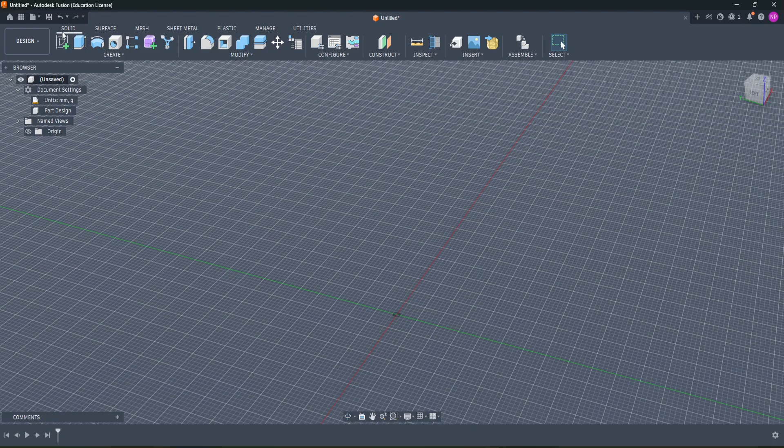Fusion is a solid modeling program, here I am in my workspace. I'm going to come up here to create a solid. I'm in solid, so that's underlined right here. I'll go to create, and come down here to box. I'll put it on my top plane here, start at the origin, and make it 20, then go up 22, so it's rectangular.

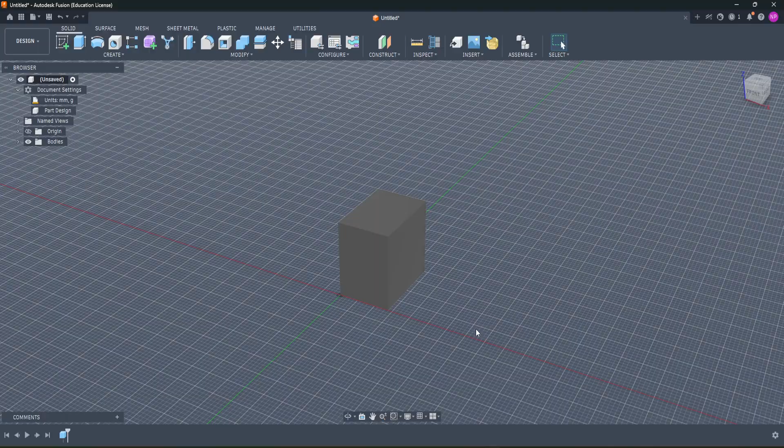Just to make the shape a little bit more interesting, I'm going to add a cylinder, extruding out from this side. So these are now one solid body.

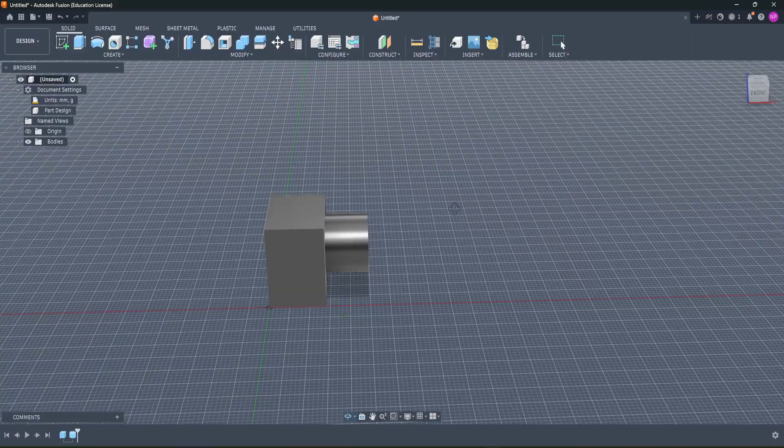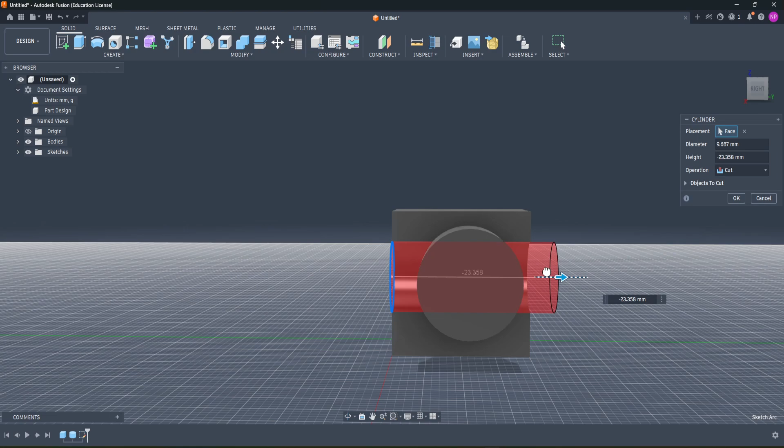Now let's say I want to make a cutout that goes right down the middle here. I can come to my front view, create a new cylinder, draw it on this plane, rotate, and extrude it through. You see how the color changes to red? That means I'm cutting through, as opposed to the blue color, which means it's a new solid. So I'm cutting through, and when I hit enter, I can see I've cut a solid hole perfectly through this object. If I go to my front view, it is perfectly circular. That's pretty cool.

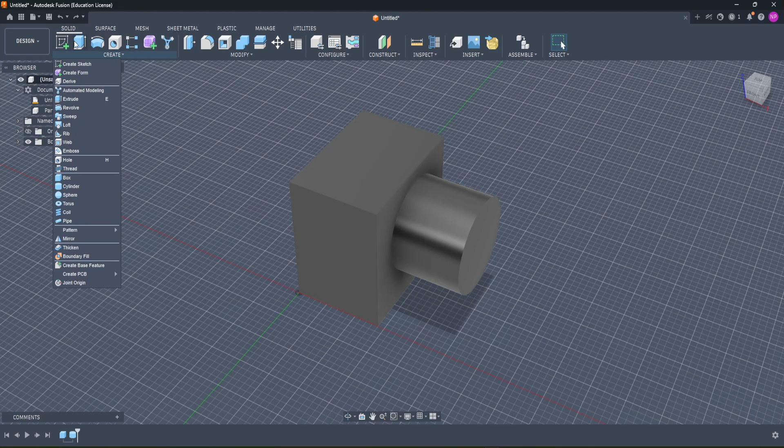Another way I can do it, if I want a more complicated shape—this time I'll cut through the top here—I can go to create, first make a sketch on the top, and create a fit point spline just to get a pretty funky looking shape in here. I'm just clicking to add my points, like that. Pretty funky shape. I'll hit enter to finish the sketch.

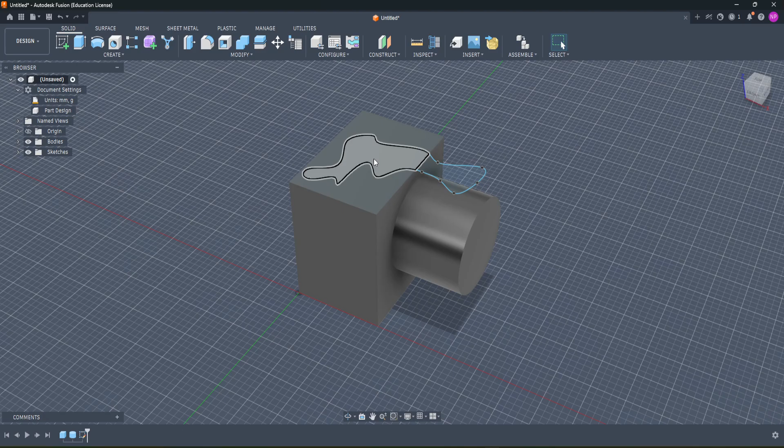Now I can select these: I left click in here, hold down shift, and click and click. So now I've got those shapes selected, and I'll hit extrude, making sure to click and drag this arrow down through that shape, then hit OK. It'll think about it for a second, and now I have this really funky cutout going all the way through the shape.

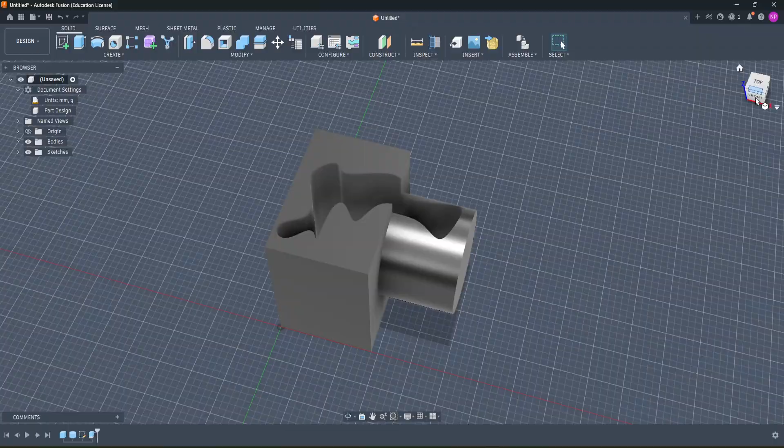So I can go up to the top and see that exact shape right there. Or I can rotate it, look at it around, and get the cast shadow of it. That's pretty cool.

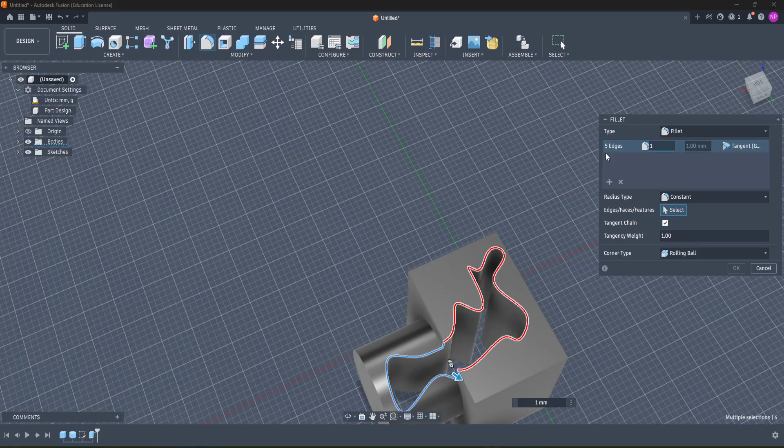I could add a filleted edge if I wanted to, to fillet off this edge like this, just to see what it looks like. Click and drag it a little bit—yeah, there we go. That's pretty seamless and smooth. And then I can just say okay.

Cool, and yeah, that's how you make a cutout of a weird shape in Fusion.